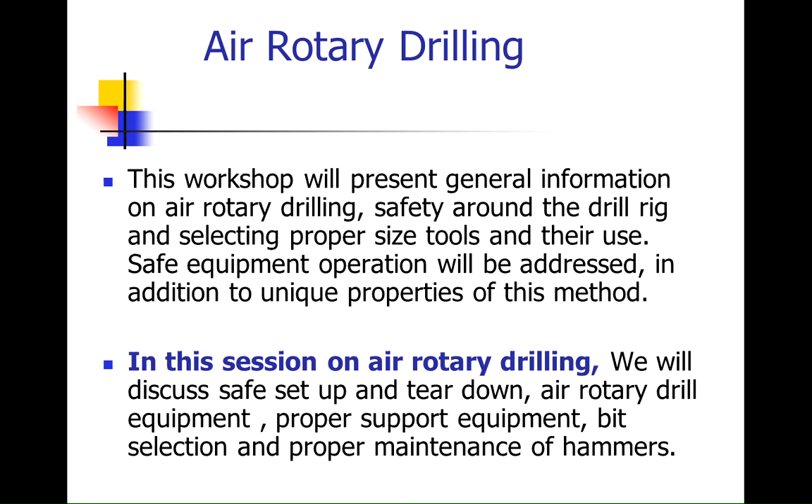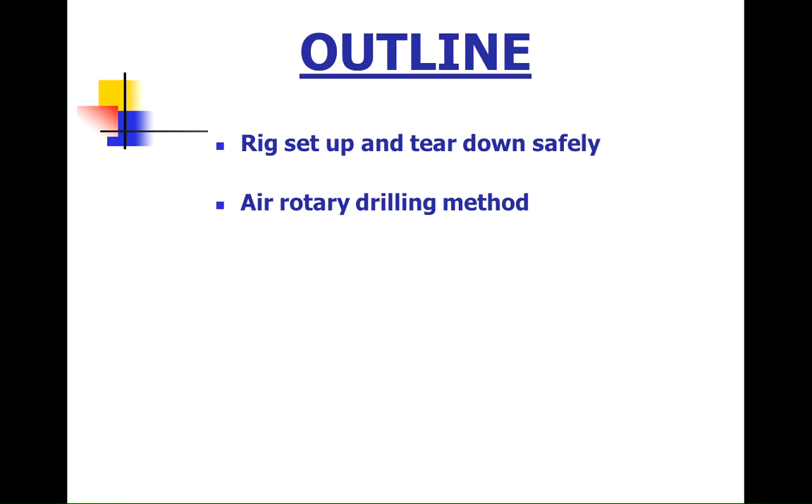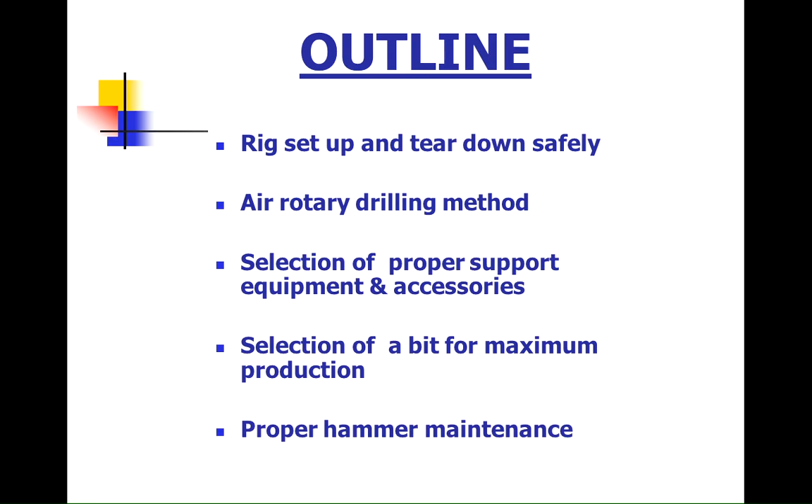So the outline is: rig setup and teardown safely, air rotary drilling methods, selection of proper support equipment and accessories, and selection of bit for maximum production. Proper hammer maintenance is of utmost importance—you take care of it, it'll take care of you.

Rig setup and teardown. I'd like to share with you some safety measures, things to consider at the site location prior to setup. Are you at the right address? This happened last year in Minnesota, and I had another class I was at yesterday with the same incident, where a development with new homes going in set up and drilled the well on the wrong address. So check your address very closely.

Other considerations: always call for utilities locations. Most all states have a one-call system. If they don't, there's a federal number, 811.

They only locate public utilities. Most of our problems are private utilities. And I bet everybody would raise their hand, and I see a lot of heads nodding right here. There are companies that will do these locations, or as we did, we got tired of waiting for everyone.

We bought our own equipment. Yeah, they're a little expensive, like $4,500 apiece, but we got one for the backhoe operation and one for general use. The unique thing is these instruments are probably 10, 12 years old, and occasionally they need some work, but they do serve their purpose because the utility companies locate within 3 feet.

Your obligation is to find it and hand dig it. Yeah, I do that in Minnesota this time of year. But we can locate with these locators right to the nth degree. We can get right down to where you're right on that marking if you use the time and effort to do it, and it saves you in a lot of cases.

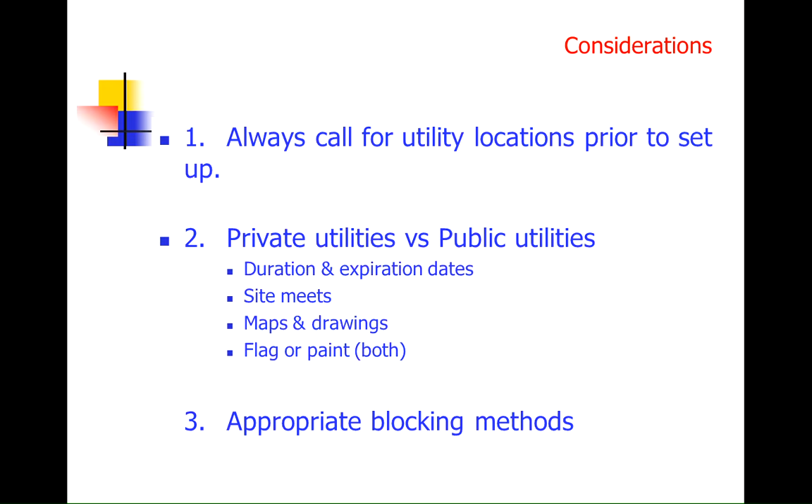Never, I say never, use pallets, cement blocks, or scrap lumber to support this $500,000 to $750,000 rig. You're going to have problems. We did years ago, and it came back to haunt us.

What happened is there was a site that had been developed and sat for many years. We didn't understand there was a high water table in the area, and they put in several feet of fill. We drilled the starter hole, put the casing in, went to push it down and seat it off, and suddenly a massive hole opened up around the left jack. The rig went on over. On that site, they didn't want the drill cuttings all over, so they left the backfill out of the basement. In Minnesota the basements are 8 feet deep, so they wanted all the cuttings to go down into that area. So the rig not only tipped over horizontally, it went another 8 feet further.

There were some costly repairs and downtime on that. We don't need that to happen. So to accommodate that, we came up with these 3-inch thick, 12-inch wide, 12 feet long timbers out of white oak. They support the rig real well. Yes, they're heavy, but we've had several blowouts since then with no tip-overs.

Some of these blowouts have been big enough that it takes 2, 3, 4, even 5 yards of material to move the rig slowly off-site, re-establish that drill site, and move back in. But we haven't had any problems since.

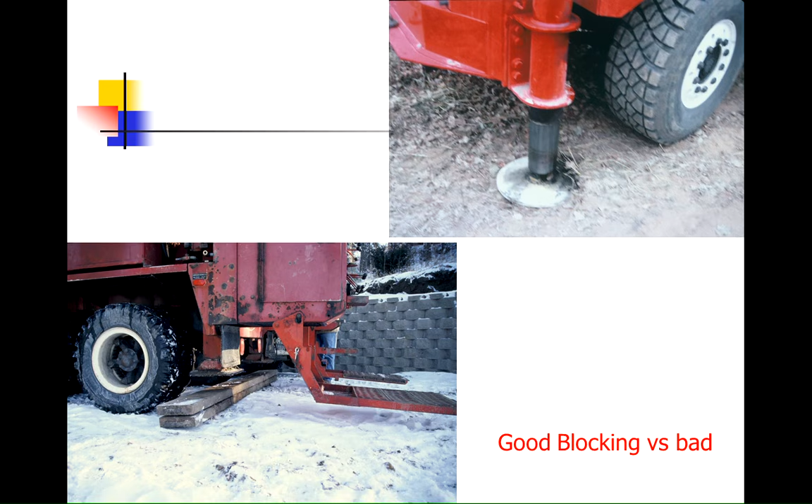Now this driller built a bigger pad for his rig, actually about 30 inches in diameter. It looks like it's big enough, but look here, guys and gals — it slid back a little bit. Oops. There was no blocking underneath the rig except for those pads.

Look very closely — that blew out from here all the way under these stands right to the back tires, and it's about 5 feet deep. That ruined a good day of drilling. It was quite costly to get that rig back up onto its pads and re-establish that hole. So again, there is a reason for proper blocking.

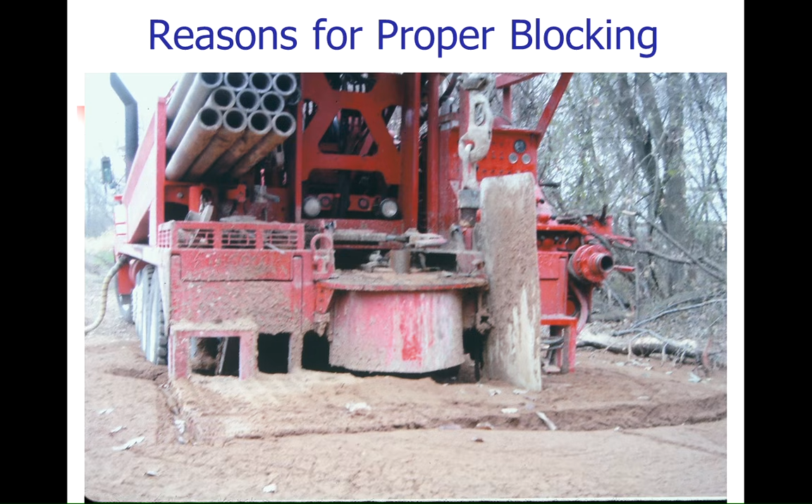Air rotary methods — we want to talk about air rotary drilling.

There are good resources available. First, check with local drillers and the manufacturers and suppliers of different products for rotary drilling you may be doing. The NGWA bookstore is another good reference place. We've got the Missouri Water Well Handbook — I use that all the time — and other handbooks available. Also Groundwater and Wells, 2nd edition; I have the 3rd edition, but I don't have a current slide for it.

These are all great resources for starting to understand the air rotary drilling method. But again, check with your local drillers and see what they're up to with their operations — they've probably experimented considerably and understand this more closely.

You ought to understand, for air rotary, what formations you're going to drill. Are they soft, medium, hard, crevice, cavernous, or all of the above?

Then you have to determine what size hole or holes you'll be drilling, what size drill rod you'll be using for your uphole velocity, and what depth you'll be drilling to.

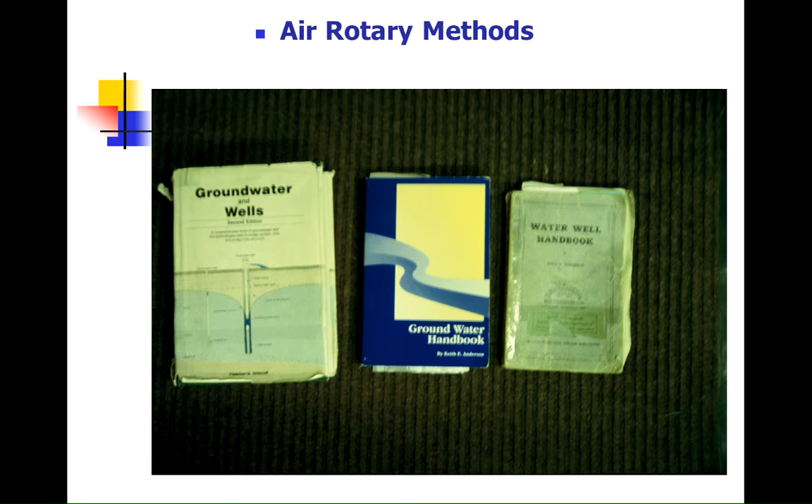Then we have to look at what available CFM (cubic feet per minute) or PSI (pounds per square inch) you have available, or will need, to perform this operation for the best cleaning and penetration. In general, few drillers have too much air.

Air density can vary considerably based on sea level versus 5,000 feet in Denver. That compressor can have as much as a 17% loss at higher elevations. Humidity and temperature also affect this operation — so if you have a hot, humid day, your air compressor isn't going to put out like it should.

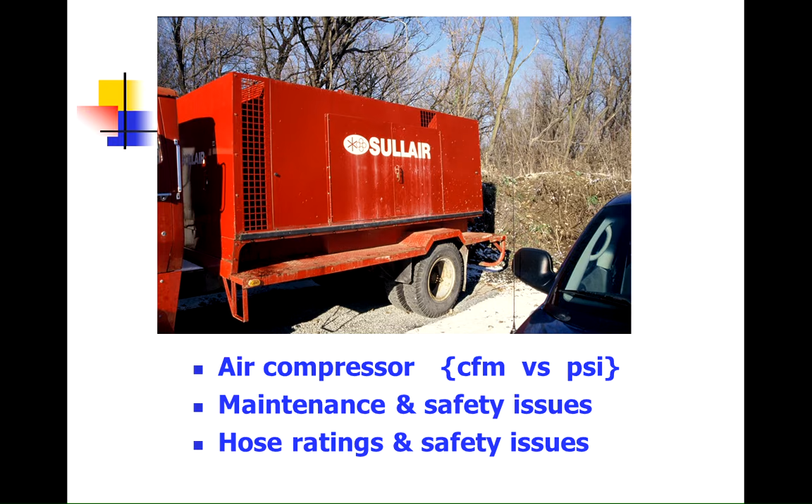We've talked about CFM and pressure, and each hammer has a range. So do you need one compressor? Do you need an auxiliary compressor, or do you need this compressor system that one of our local drillers has? By the way, that was his rig in the previous slide that had the blowout on it. You wonder why? These are 1,200 CFM, 350 PSI compressors that he runs constantly together. I don't know why or how, but I don't ask.

But they can create problems, as we discussed. Our rigs have 850, 350, and that basically fills in the range of what our hammers are required for a specific range of operation. Each hammer has a low and a high point that you can operate in, and you got to pick something in between for optimum operation. So you have to know that.

Anybody have any ideas on some of the safety factors that you would have with high pressure air? Let's cover a few of them.

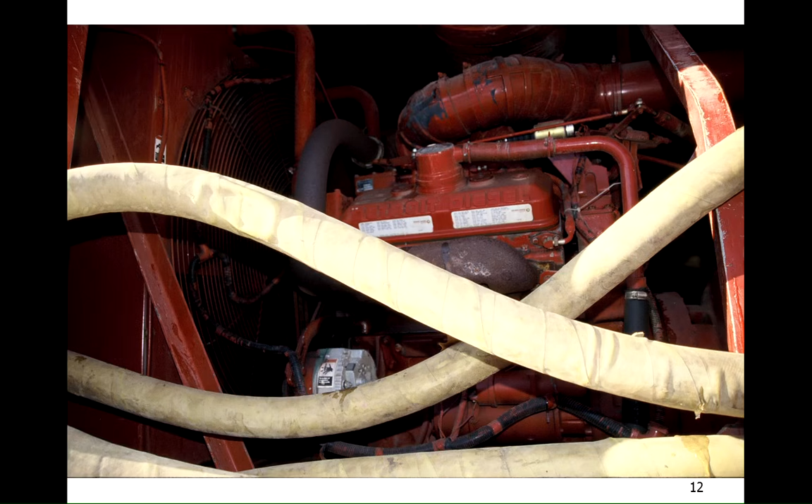Maintenance and safety is of utmost importance. Keep the maintenance up to snuff and safety will come into play. Safety relief valves at the proper setting, not like your mud pump blow-off valves where you're putting those finishing nails in. Keep them at the right setting because you're talking with 350 psi of air pressure, and we'll talk a little more about that.

We talk about blowdown valves. This is a relief valve, so when you're done drilling with a rod, you take and open up this blowdown valve, and you can relieve the pressure, most of the pressure on the drill stem prior to adding another rod.

This picture here shows a hose with some bulges in the casing. I think you can see them from the back, but this happened quite quickly. It was an older hose, but it was a hot summer day, and all of a sudden it started showing bulges in it. That's ply separation. That means you're going to have problems with a blowout sooner or later, or that thing blowing apart, and certainly don't need that. So understand the hose ratings to come into play with the safety when you're purchasing new hoses. You put in a fudge factor in there for temperature and pressure.

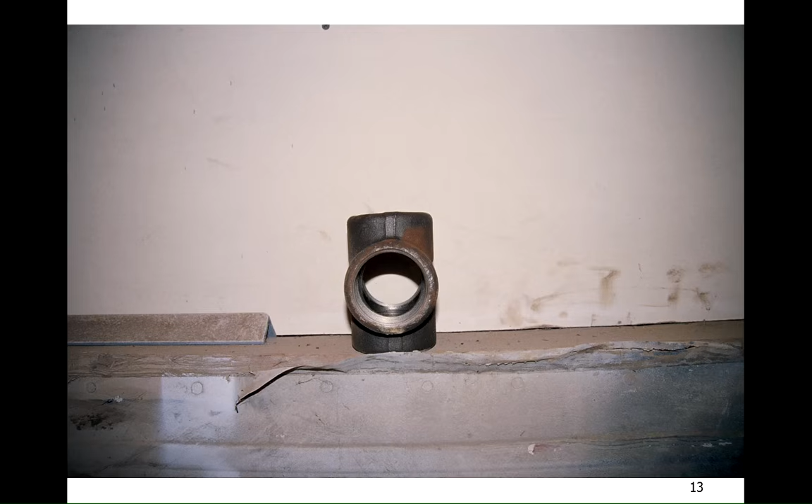Select the proper fittings. You're talking with 350 psi of air pressure. You don't want to be using a standard fitting on that. So if you do any replacement plumbing or additional plumbing to that rig, make sure you have the proper rated fittings.

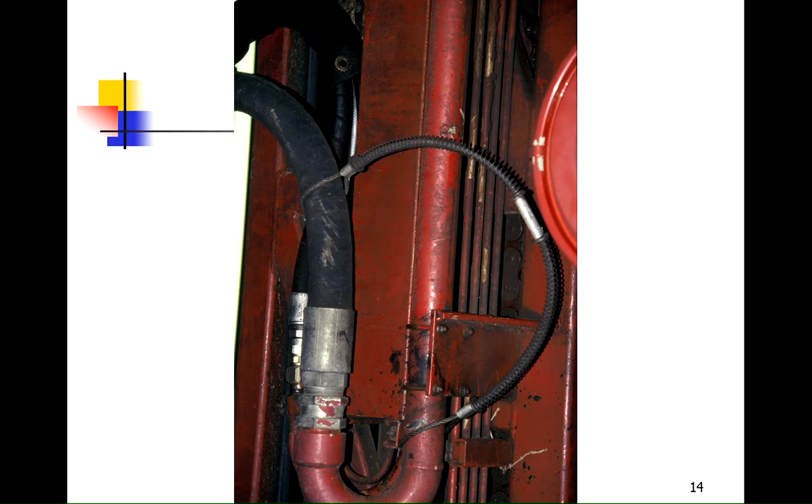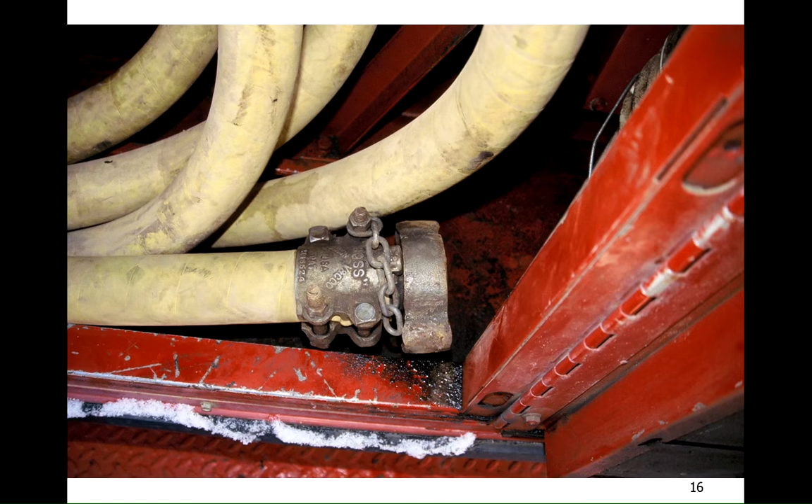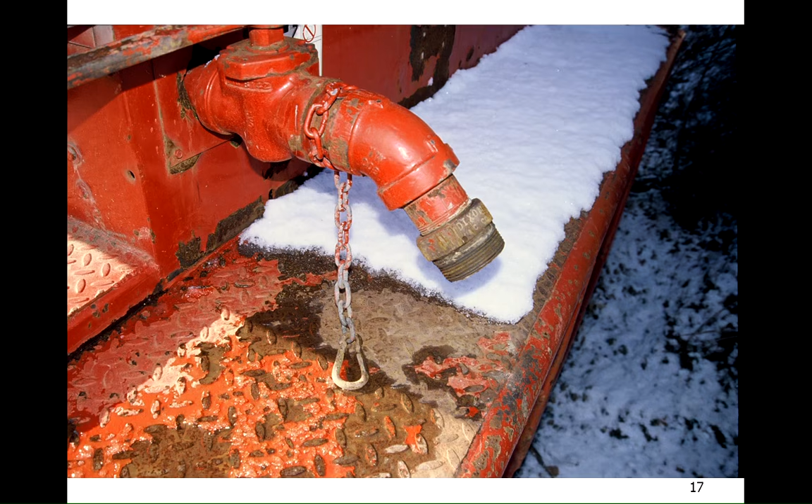Hose securement is of utmost importance, and most of the manufacturers of the equipment nowadays are putting lanyards on there so that they're secured, and that way if they unscrew or they blow off, generally it happens at the joint, they'll be secured. Now if you can't do that, here's that old hose that has a compression fitting on there. You put a longer bolt in there, a short piece of chain secured down with a lock washer and a self-locking nut on that, and then on the back of your compressor you can put a short lanyard chain on it to hold it on, so if it unscrews or blows off, it's not going to hurt someone.

This happened on one of the drillers up in Hastings, Minnesota, a big dude, and that hose came off up above, came down and hit him, and it took him to his knees. He's here to talk about it, but that could have been really a dangerous situation there, having a hose blow off at 300 psi.

Importance of proper bit selection. Look at the formations on that rock formation in Hudson, Wisconsin. You've got every variety of garbage there that you could ever dream of with all these varied conditions. So when you make a bit selection, you're going to have to determine what possible formations you may be drilling in and make that choice. If you're going to use a mill-tooth bit, generally, if you're getting into a cobbled mess like this, I recommend a short tooth, which is a hard pattern bit, so you can accommodate all the different drilling techniques. And again, if you're getting into a softer formation, you can get the longer tooth for better penetration.

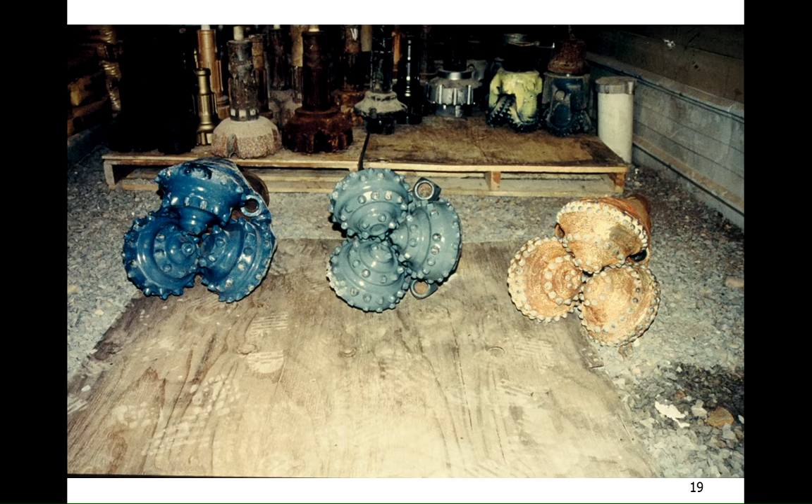If you're going to use carbide button bits like the blue one up on top, then you can select those for the formation you're going to drill in. The one on the right is a short pattern for hard formations. This is a medium pattern with medium buttons, and this is a big button pattern here for the softer formations. So check around, figure out what you're going to need, and go forward with that.

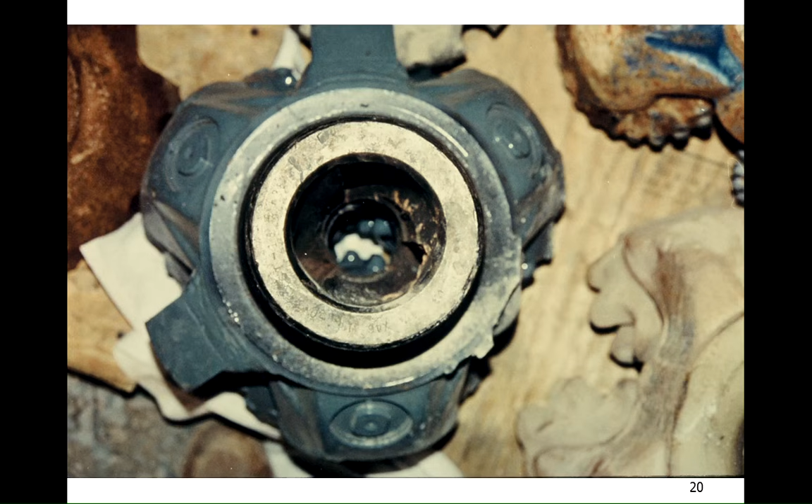The other thing that we use and comes in quite handy is on the mud rotary, they blow out the retipped or used bits in the center for better fluid. This holds true with the air compressor air rotary method. It allows more air, volume, and pressure to go through there for a cleaner surface on the drilling bit. Therefore, the penetration and production are a lot faster.

Anybody using the PDC bits? Okay, they work pretty good? Like anything else, some formations they work good, others they don't.

Downhole air hammers. When considering the method of drilling, several questions need to be considered, as we just covered: the formations, the drill rod size, the hammer selection, and things of that nature. Bit selection is very important as well. Again, we talked about the different sizes, and then experiment. Talk with your local reps as to what other drillers are using in the area, understand the formations you're going to drill in, and then experiment.

Some hammer and bit manufacturers come to us drillers occasionally with a bit or a hammer that they want to experiment with. Let them do that. It might take a little downtime, but it gives you a free hammer and a free bit for a while.

They don't always work. We had a bit supplied to us and a new style hammer, and our formations, as you saw earlier, are a hodgepodge of everything. That bit shanked on us. They brought us another bit, it shanked. They knew our history of not having shanked many bits over the years, so they went back and checked it out, and it was designed for a softer, consistent formation, not ones with soft and hard formations and crevices in it. So they removed that hammer and bit combination from our region, and they use it elsewhere very, very well.

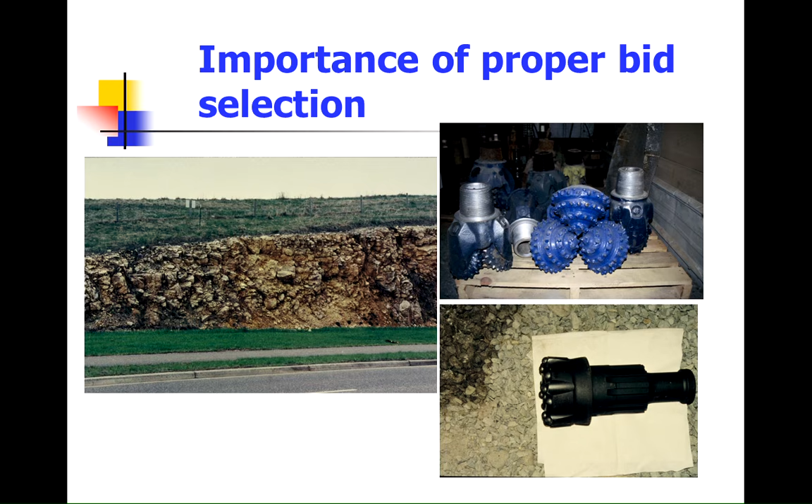Bit size and hardness is very important in bit selection, as we talked about. We generally use a flat bit, like that black one down in the corner, for small diameter holes. It's flat and it penetrates quite well. Another reason we'd use that is in an area where we didn't want to use a stabilizer - we can run that flat bit and run a pilot hole down, whether checking for nitrates, VOCs, or whatever. We can get the water sample or determine where that aquifer is and if the formation is stable enough to put the casing in and complete the well. Run that down 200, 300, 400 feet, whatever, and then you're ready to open the hole.

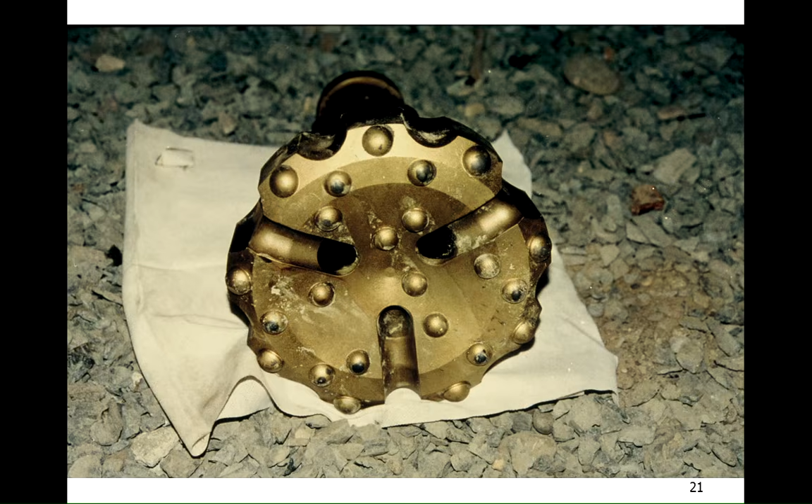There's a concave bit there that we use in larger diameter formations. The concave runs it straighter in the varied formations. But then we open it up with what we call a hole opener. Have you guys used hole openers in the past? It has a shank right here - there's a guide shank that goes in that 6-inch hole, and this is designed for 6 by 8, 6 by 10, 6 by 12, whatever you desire to open that hole up to. They work quite well and speed up the operation in developing a hole of that size.

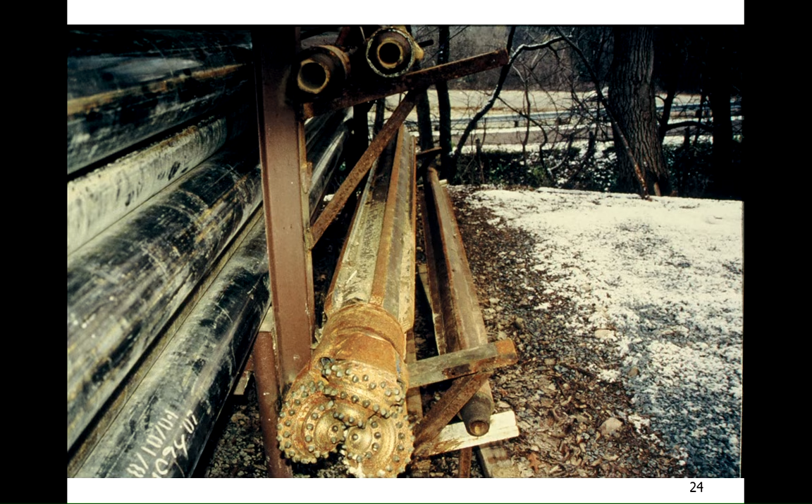Stabilizers. This is one we would not want to use in air rotary drilling in bedrock - this fluted style here would knock a lot of chunks loose. You would either use a barrel tube type or a spiral type stabilizer, and I'll show you another alternative later. Stabilizers are used quite often in bedrock to keep the hole straight, because there can be crevices at different angles that cause the hole to wander. Again, you'll have to experiment with it and see what works best.

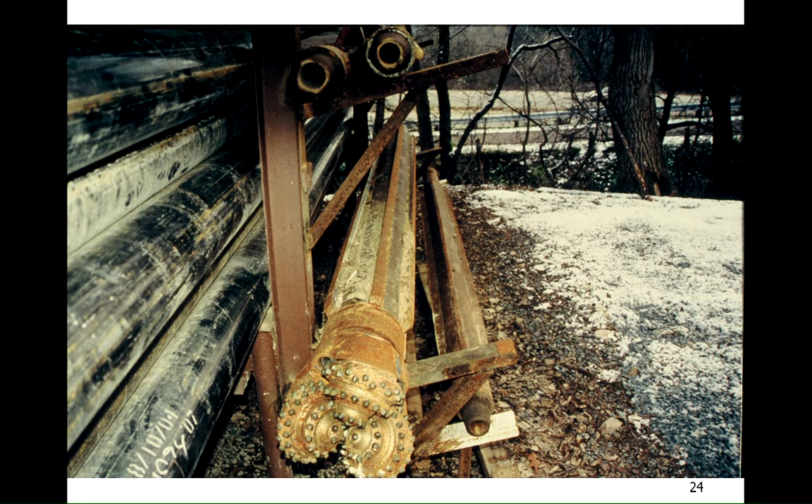If you do use these different stabilizers, you may want to consider putting some drill out lugs on top. The reason is that in the drilling operation, you may knock material loose that falls down on the stabilizer and tool stem as you're trying to get it out. With those little lugs on there, you can back drill your way out and regrind it backwards. We've used that on several occasions over the years, and it saved us on recovering those tools and maintaining that hole.

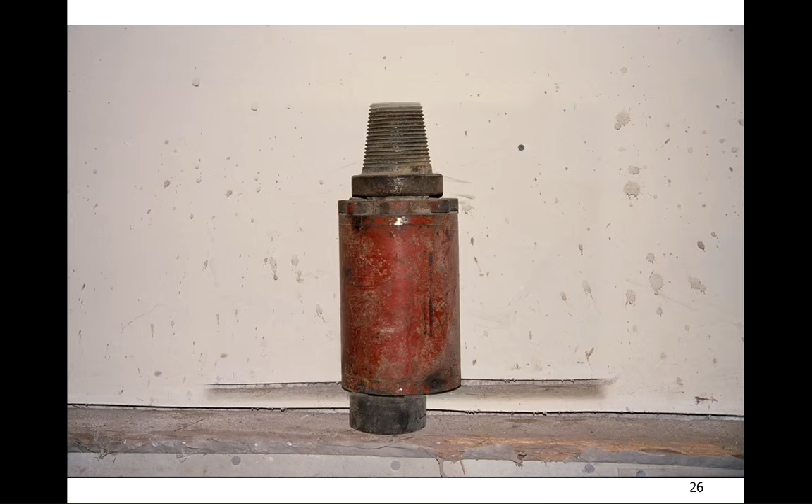Let's talk about rotation speed - I skipped over that for a reason. Rotation speed is extremely important. Of course, with tricone you want to run faster for better penetration, and the rotation speed is controlled by the rig you have. If you have a table drive, as Roger was talking about in the other class, that gives more options for speed selections for tricone operation. But when you come to hammer operation, you want to slow that down.

Okay, let's go over to the top head spindle drives. You're pretty much controlled by the speed of the orbital motors on the top head drive, and generally when you buy the rig, you make a selection of orbital speed drive motor speeds.

That was really unique. You design the top head for the orbital speed that you want, the spindle speed. So if you're going to do a lot of rock drilling, you try to decide what speed you want based on your hammer rep's specifications or suggestions. But again, it makes a difference whether it's a table drive or top head drive.

Saver sub, I'm looking at one right now. How many use saver subs? Good. That saver sub is just a short sub with a female-male piece on it to go on the end of the spindle of your top head drive, or on the end of the Kelly, to protect the threads. Sometimes you drop it down a little bit, or you go to make it up and you hear the squealing, and it wears and tears. And why tear up a spindle, which is quite expensive, or tear up a Kelly that's equally as expensive, when you can, for a couple hundred dollars, buy one of these saver subs and screw that on and let the wear and tear happen on that unit.

Pull down and hold back pressure. Pull down is usually used at the start of the hole because you don't have enough weight on the drill stem to get the proper weight on the hammer or the bit for best penetration rate. So you would use pull down, pulling hydraulic pressure down on it, or on the Kelly drive, your feed, to keep a modest pressure on there for best penetration. Hold back pressure is used as you start getting down several hundred feet and you keep adding each one of those 400-pound rods. Now you get too much pressure on there, and it's going to cause excessive wear and possible breakage on your drill stem and your tools. So you use the hold back pressure to hold that to the maximum weight that would give best penetration for you.

We had a gentleman that borrowed our hammer for a table drive rig. I tried to explain to him the importance of slower speeds and lesser pull downs, and to listen to the hammer making a good rat-a-tat. And he, probably like me, hard of hearing, went out there and put that thing in high gear and put all the pull down he could on that thing, and there was a muffled sound on the hammer, which became a squeal not too much later. He ruined a good bit, but he learned that there's importance to slowing the speed down and taking all that pressure off. They paid for the bit, and it was a good lesson learned by all. I still rent my hammer out to them once in a while.

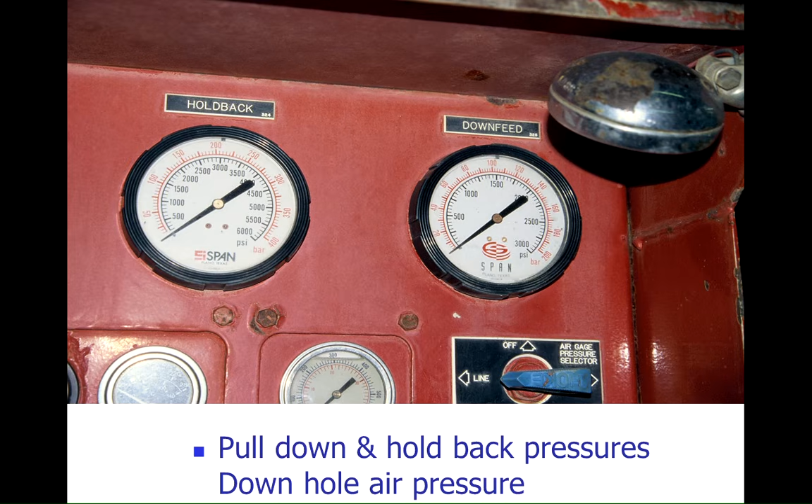So when we get done with the drilling, we give it a little more time with the foam to clean the bottom of the hole, and then we would shut the air down, pull the discharge valve, the blowdown valve as we call it here, relieving that pressure, but be aware that there still can be some back pressures there.

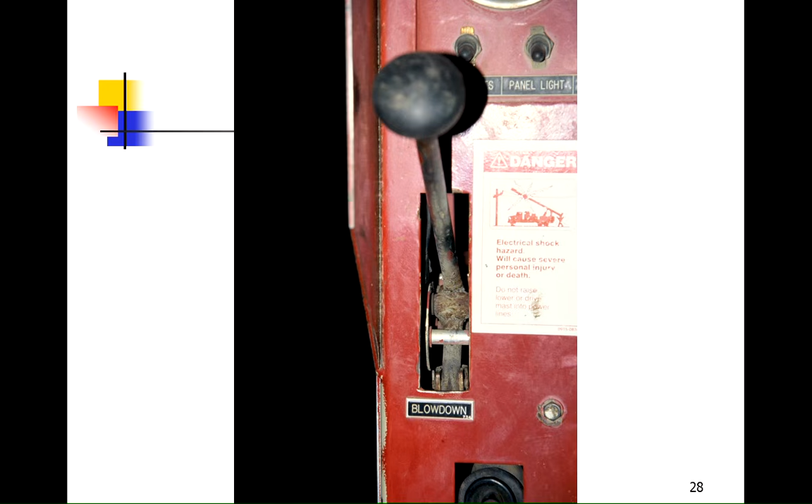Let's get into some PPE.

Of course, we were just talking about taking those rods apart and the potential for debris falling out or blowing out of those rods. You want to use good hearing or good eye protection, and make sure it's ANSI approved so that you don't have any shattering of cheap lenses that could cause eye damage.

A lot of times our guys will wear sunglasses designed for being out in the bright sun and what have you. They're real cheap to buy, so keep some extra ones in the truck so nobody gets hurt. Safety glasses can be bought and worn by those that wear glasses.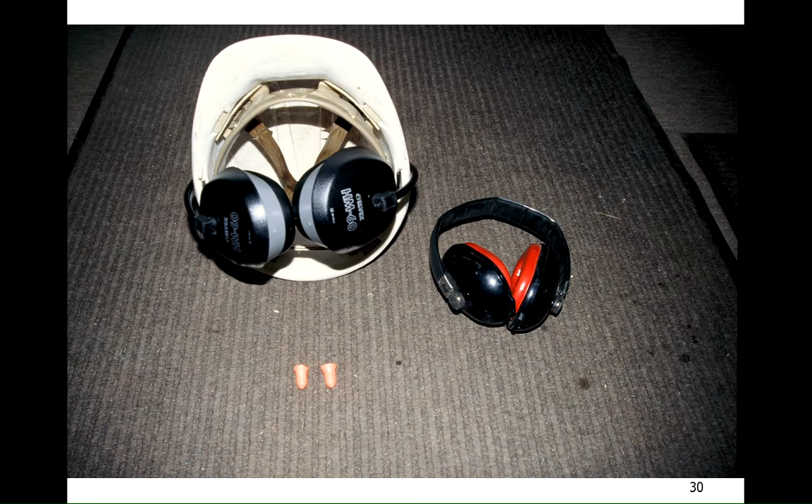Gloves are of utmost importance. When you're drilling in the summer, those drill rods can get extremely hot with the temperatures coming through from the compressor. And of course in the winter it's going to be cold, so you want hand protection there.

You got to be careful with the drill rods. They can get little scuffs on them from the breakouts, and that can cause some cuts on your hand too. So why not wear gloves and protect yourself the best way you can?

Hearing protection, there's several ways of doing that. It can be as simple as the inner plugs right here, or the helmet mounted ones. I've got one of my guys who doesn't like the weight of the helmet, so he puts this on behind his head with a strap back there, which would drive me crazy. And I had an employee years ago that had, like hearing aids, molded to match his ears. He said he really liked those - more comfortable than the styrofoam ones in his ear.

So there's a lot of varieties there, and even a couple of our people have put the inner ones on as well as the outer ones because of the long-term exposure to the noise of the air compressors and the operation of the drill rig.

Who has more exposure to the noise levels on your rig, the operator or the helper? The helper, correct. We were involved in a NIOSH study years ago, and they put a perimeter all around the rig, and it was the helper because he's walking around the rig to all the different exposures - the hydraulic pump noises, the air compressor noises, and the repercussions off the house on that specific job site, the noise of the air compressor going up and hitting the wall of the home and coming back.

But as you get into soft zones with too much air, you may be bellying out or causing blowouts in the drill hole, which requires more uphole velocity, more air, and can create caving situations that come back to haunt you. It's more costly to run that air compressor wide open to keep that hole until you get the casing in it, and it also slows down the production rate.

As a rule of thumb, with just straight air drilling, based on your hole diameter and drill rod, you'll need 3,000 to 5,000 feet of uphole velocity to maintain proper cleaning of the hole. That would be about 6 to 7 seconds per 100 feet of depth on that hole. This can vary by the size of the cuttings - dust, of course, raises much faster, but if you get something the size of quarters, it's going to take a lot of air and a little more time for that to come up.

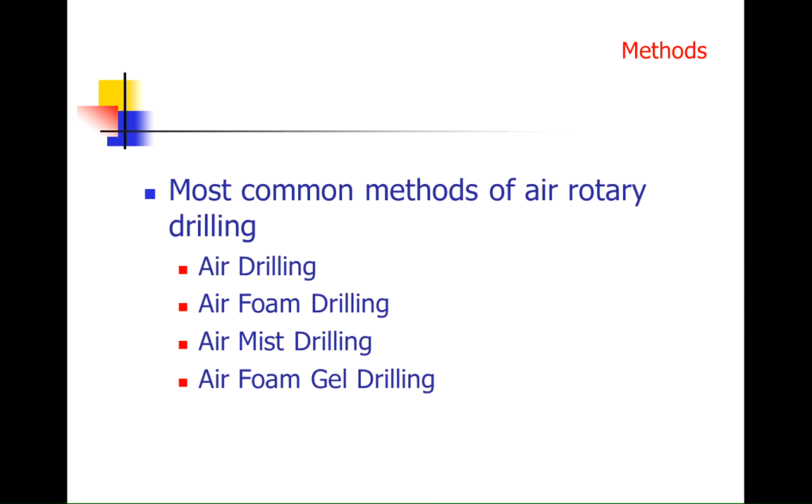You can try that method, but again, it's going to take experimentation. I just talked about pouring some oil in there. Rock drill oil is a specific oil that's environmentally safe, and it lubricates the hammer during operation. But when I first got into this, I said, oh, rock drill oil, I heard about that. So where am I going to get this stuff?

So I talked to my local supplier, and he said, oh yeah, Texaco Aries ISO 100 rock drill oil. He knew really what I was talking about. So you get a 55-gallon drum, and when this gets low, I just order another one. This helps lubricate the hammer to prevent rusting and better operation. When we run the heavier foam, we don't run the oil injection. When you're running foam like shaving cream, that gives plenty of cooling and lubricating properties to keep it going.

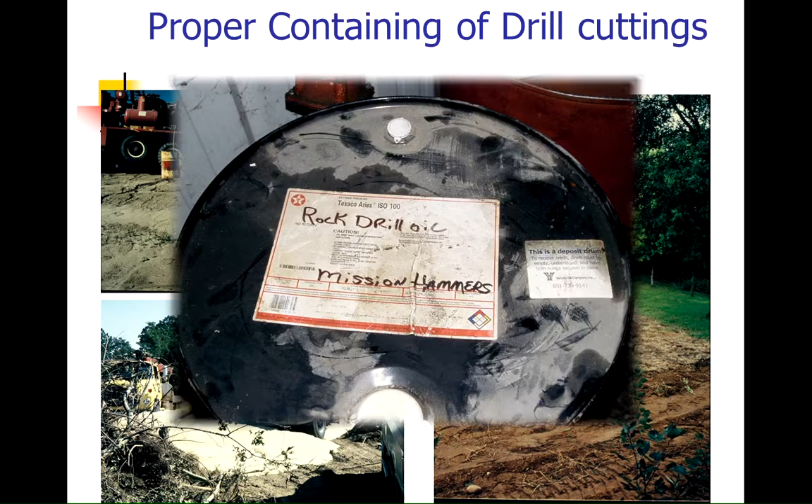Proper containment of drill cuttings - it's an issue for everyone. The first two slides on the left, of course, are very obvious. There's room for that stuff to run. Everybody's getting more concerned about this stuff, and you better have your MSDS sheets on board so when someone comes up and says, what are you drilling or what do you got, you can show them what they are.

The slide on the right, you see that little spot there that kind of goes down the yard and over there? We're on the top of a hill. Folks, there was no place for anything to go. It went downhill. When we got done drilling, we went down and we shoveled all that foam off the top of the snow. And of course, you know what happens when you tromp the grass down or you remove the snow, it froze the ground.

But in the spring, the homeowner came to us and said, okay, you got to fix my yard. Okay, fine. Well, we went out there and I took this picture. Doesn't that look awful fresh, guys? He had new utilities put in because the gophers got down and ate the gas line off and they put a new one in. He wanted me to pay for the whole yard. I said, whoa, time out. I'll help you, but I'm not going to pay for the whole thing.

Documentation. These doggone things, I hate them, but I tell you what, take all the pictures you can. This will save your little tush every time. And we take pictures on almost every job, and we're putting them in the customer files to protect you.

Containment bags are becoming real popular in certain areas, and I know Roger Renner's had to use them. For air rotary and mud rotary, you're to use containment bags. We're kind of skirting the issue a little bit in some areas. Other areas you can't get away from it. I've used vac trucks to vacuum up our materials, and we use silt fences all the time to try to prevent stuff like this. But again, in some cases you can't get away from it.

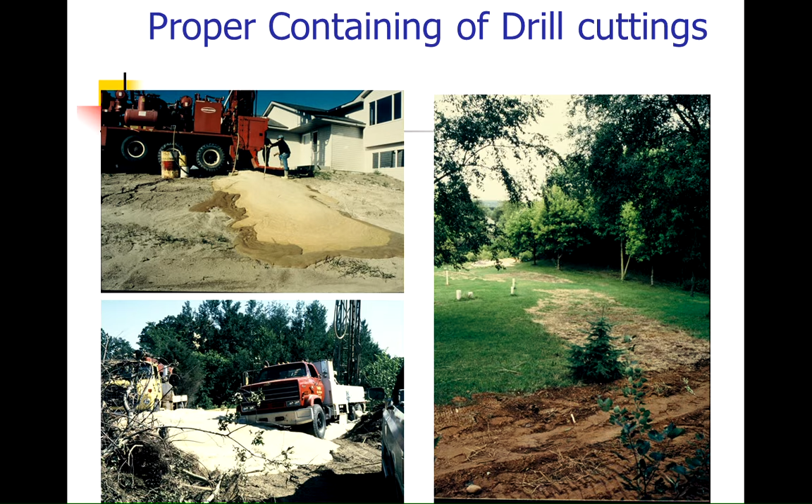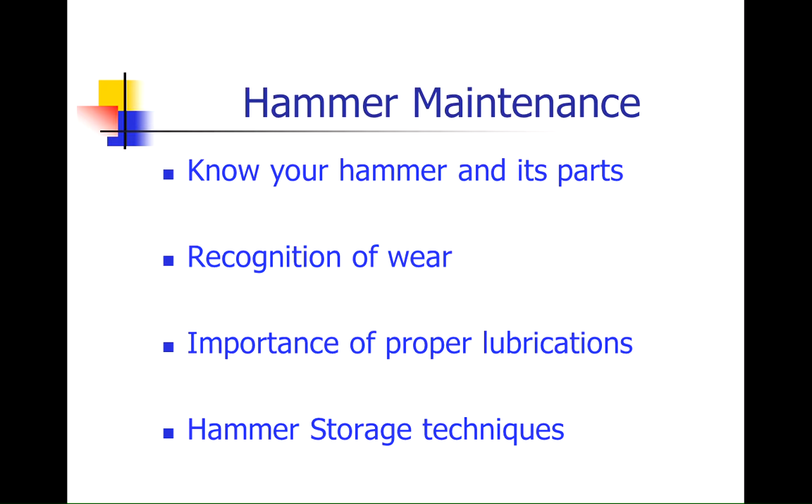Let's talk about hammer maintenance. Know your hammer and its parts. Know how to recognize the wear. And I talked about the 190 psi on our hammers, and we understand how much foam we're putting down there or how much air we're putting down there to recognize the wear on that hammer. And the importance of proper lubrication, whether it's the foam and the drill oil or one or the other. And hammer storage techniques are extremely important.

Hammer care, understand the consumables, and carry some of them with you. You've got the dart valve, the O-ring, the blow tubes that may be on some of the hammers, and of course there's a piston right there. And we carry a lot of that stuff on our drill rig, so if we see a problem, we tear it down and fix it right away.

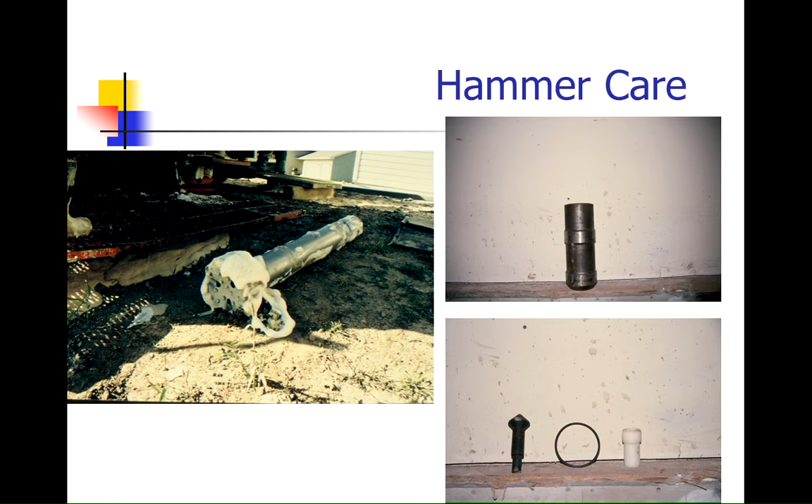And then of course here's the hammer care. We blew this hole into this formation, got it out of the hole, and put the casing in as quick as possible. Then we turned around and cleaned the hammer up for proper storage.

Always store the hammer standing up. Clean the hammer out, pour a little drill oil in it, and stand it up. On our drill rig, the hammer is stored in a 12-inch piece of pipe, so that 6, 8, 10, and 12-inch bits can fit right in there.

We've got a containment chain on it, and of course it's capped on top. Then the little hammer in the shop is stored up against the wall, chained down next to the big hammer. That guy is about 6'3", so you can understand how long that is.

Remember we talked about stabilizers, and I told you we were going to show you something we did in place of a stabilizer. This is an 8-inch hammer, 8, 10, and 12-inch hammer, with a 4.5-inch box on it. Our hammer rods are 3.5-inch. To put a short sub in there would put a lot of strain in that part of the system. So to reduce that, I went to a machine shop, and he made me this 5-foot-long solid steel rod with a 2-inch hole bored through it, with a 4.5-inch pin and a 3.5-inch box.

It's amazing how rigid that is and how that keeps that hole straight. In a lot of cases, based on the size of the hole and the formations we're going to drill through, we don't put a stabilizer on. So it saves us carrying extra weight out to the job site. It's things like that you can turn around and develop on your own. We also put some slots on it so the fork would fit in for tear down and makeup.

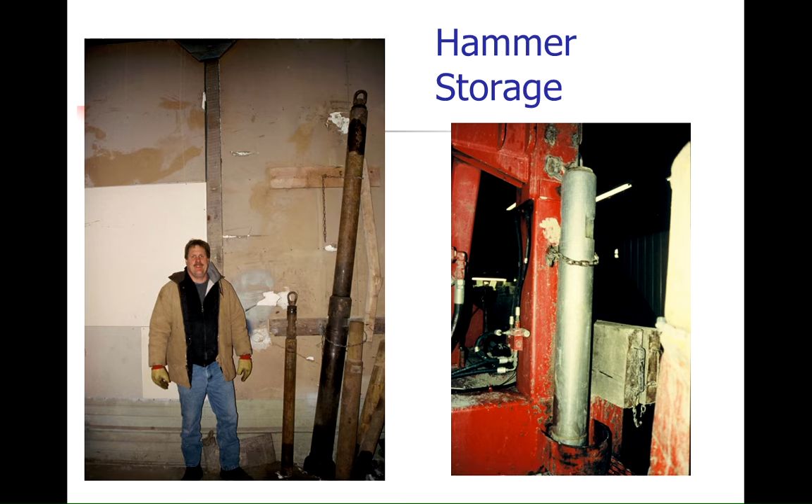But again, store the hammers in an upright position. Make sure they're clean. Same way with the hammer transport - we've got these hammers in the back of the tanker there, and we've got the plugs in them.

And we got called in on the scale for not having it secured. That's nothing more than a dog chain. Last 5 years they haven't argued with us - it's something that secures it. They told me I had to have that securement chain on there.

He's a rookie, and his boss laughed at him. But he says, you know, in case you hit a bump, that could bounce out of there. And I said, sir, with a tri-axle truck at 50-some thousand pounds, if I hit a bump hard enough to pop those hammers out of there, I don't want to be in that truck. His boss laughed at him, but he says it needs to be secured. I said, fine, no problem.

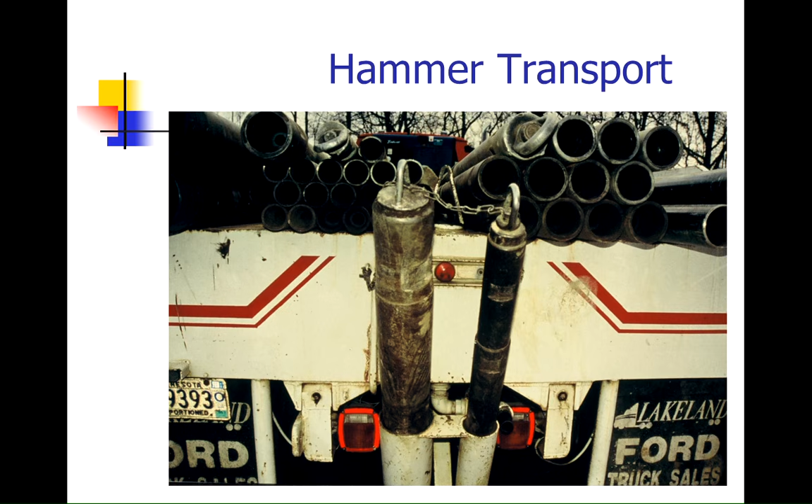And on load securement, we'll talk about that in a minute. But if you take care of these hammers, they'll take care of you. It doesn't take a lot to blow them clean, flush them out, put a little oil in them, put a cap on them, and secure them properly.

I don't know any man around here that can handle a piece of 4-inch, 6-inch pipe on top of their helmet, and if one of you say you can do it, I'm out of here. Hold on, back up - I want to show you one other thing. In that corner down here, it's hard to see. I'll tell you what, I've got another picture.

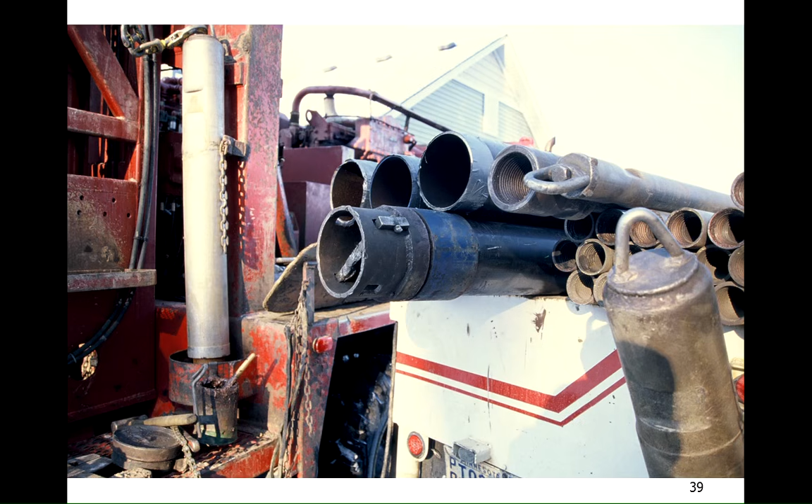There, up there, right here is a basic screw-in plug with a swivel on it, and we put some 7/16 rod on there so you can turn it better with wet hands. But that can get worn, bent, or cracked. Inspect all this stuff all the time to make sure you're not going to have a problem with it.

There's another item right here. This is what we use on 6-inch plain end that we developed to elevate the casing and use the hammer to screw it together and drive the casing. How that works - it's a little hard to see - but there's a limiter ring right there that limits the amount of threads that can be threaded into that coupling so you can unscrew it.

Another look at it - here's the 3/4 inch wide plate, about 2 to 2.5 inches thick, that the hammer sets in on. A 6-inch hammer with a cross pattern sits right in there, and you can screw it together. It's an old dummy bit anyway with no buttons on it, and you can drive that casing on down to seat it off.

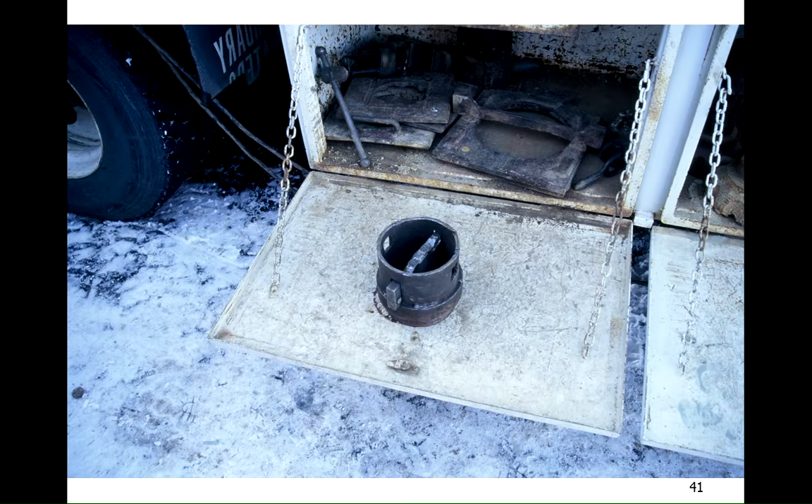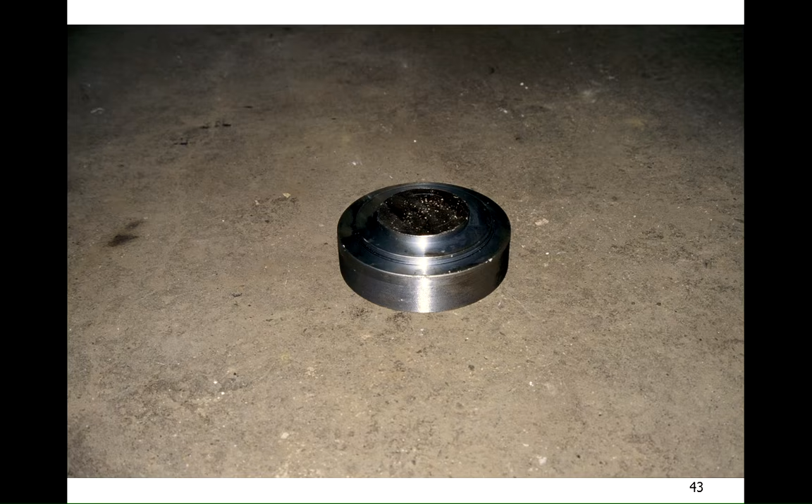We make driver plates to go in the 4-inch and 6-inch casing. We buy stock at a local supply house, put it in the lathe, and turn it down so there's an adapter that goes in 4-inch plain end and threaded, and 6-inch plain end and threaded, all in one unit. It has an indent on top where the hammer sets in so it doesn't scuff off or kick out. It really helps us in seating off the casings.

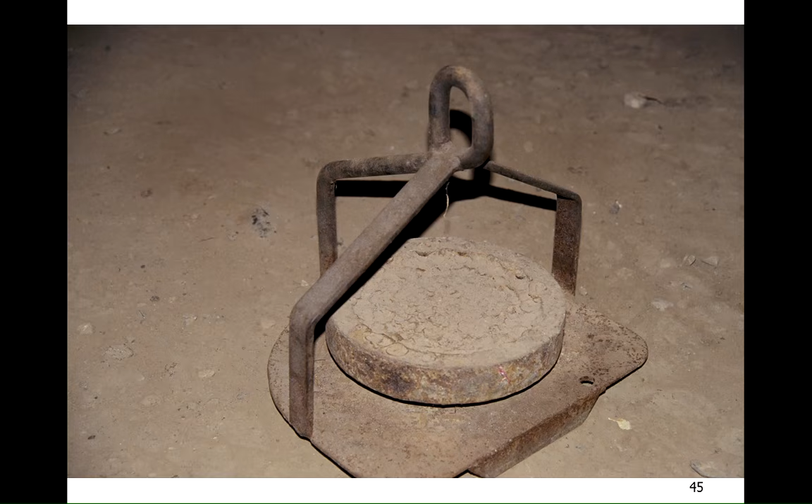To get that driver plate in place, sometimes it's up 3.5 feet or so, off the table. You know what the regulations are, guys. We've built this basket here, and you can see this little plate. It kind of cocks it backwards, and these are more towards the front, so it's a cocked situation.

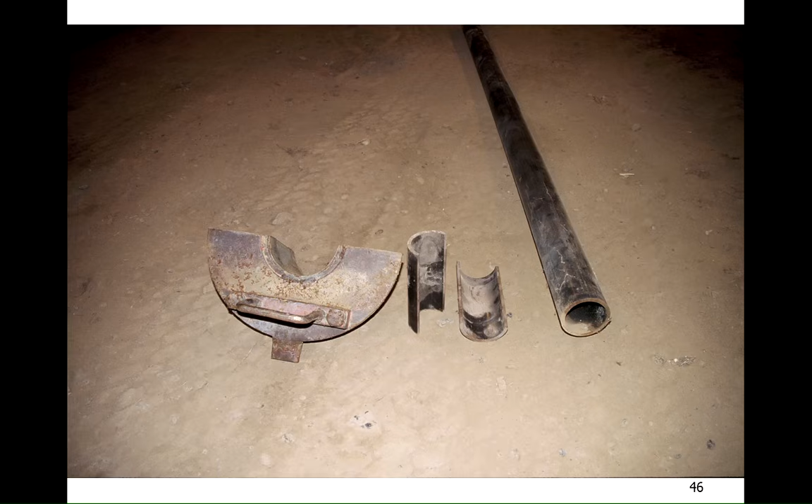So you take that up to the point, push that driver plate onto the casing, and you can drive the casing. It's up to you to decide how and what you want to do with it, but these are just some suggestions.

The other thing is guide slips on the table on the drill rigs become worn over time. The drill rods get worn, and you get that blow-by, and it's a pain. What we found is once they wore to a point after the rig was a few years old, we took them to the machine shop. We found this nominal pipe available at a supply house, and we had them machine it out to accept the outside diameter, cut the length we want, then cut it and split it in half. Install those in there, weld them in with stainless steel rod, and use them until they wear out.

Then you just grind the weld off, take another one, cut another piece, split it, put it on there, and weld it on. It gives a very tight fit on those drill rods, because if your drill rods are wobbling on top, what's it doing on the bottom, and what's your hole going to be like? The straighter you keep the hole, the more production you can make. This is just an idea that we use, and it works quite successfully for us.

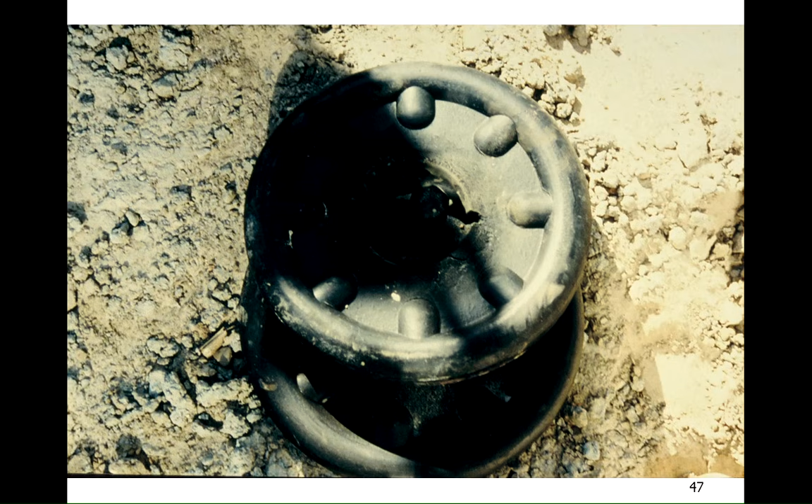Your donuts, as they're called, sit underneath the table to prevent debris from blowing up. We found a little trick: using the small diameter 2 7/8 rod size donuts until they start blowing by. We've got a belt cutter, and what we do then is cut it to the 4.5-inch rod size. You get double wear out of it. Nah, that's not good enough—let's go for triple wear.

What you can do is on our 8x4 wells, take that donut that's starting to leak on the rig and put it on top of the 4-inch casing over the 8-inch casing, and that prevents the debris from going down on your final drill out.

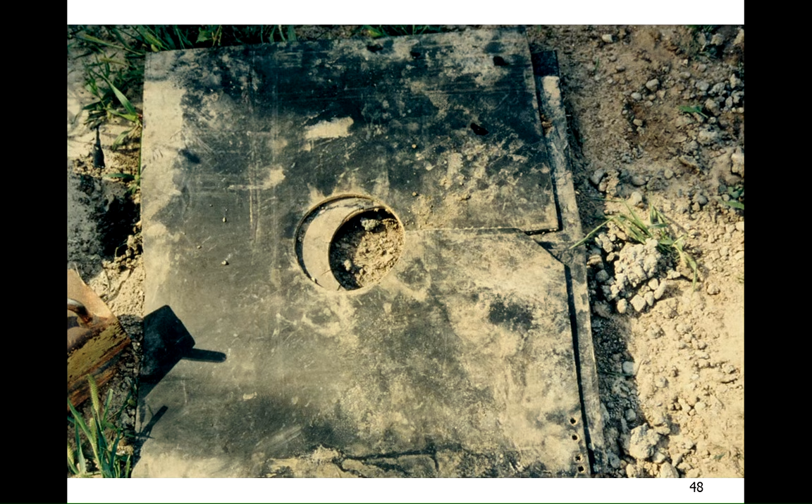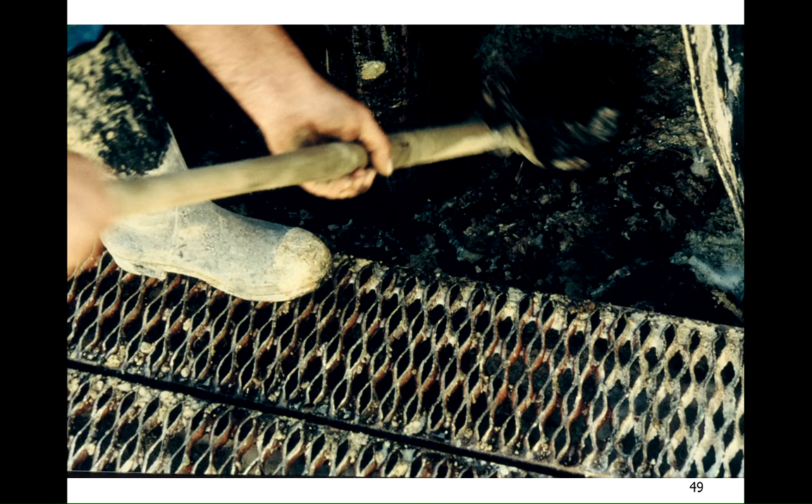And if you don't have that on your rig, you can take some regular conveyor belting from the local gravel pit, cut a hole in it for the size diameter of casing you'll be using, with a little split, and put that over the two casings. Then you shovel a little material on it so the cuttings will wash away and not go down the borehole, which prevents you from getting a good grout job.

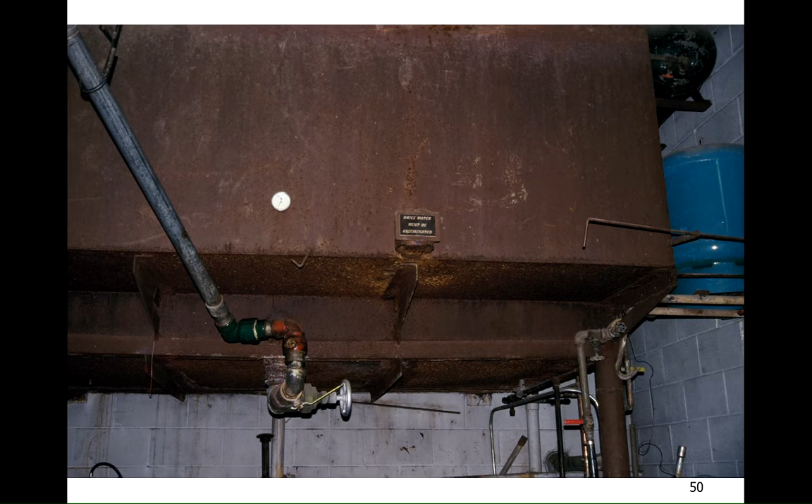Minnesota gets a little cool up there occasionally. It's a mindset, folks. So this is my old tank—I've got to get some pictures of the new one.

This is a 2,500-gallon tank in our shop that's about 7 feet off the ground. They back the tankers in and use this pipe right here, and it goes down in, and they download. What's unique about it is I've got a 60,000 BTU gas furnace hooked up to a 100-foot roll of 1-inch K copper, closed-loop, spiraled through that tank back into the furnace. I have a Roberts-Hamilton ball valve for filling that tank automatically, like a toilet.

Then this furnace kicks in, and in the beginning of the season we set it at about 90 degrees. As it gets colder into the winter, we go up to about 140 degrees. You don't want to go any hotter than that, because it gets so much steam you can't see anything.

And oh my God, does that make beautiful bentonite. Carl Mason was up in our area helping us out with some stuff, and we mixed up that bentonite, and he says, I have never seen bentonite so creamy in all my life. It mixed real well. The guys are standing there on the side of the truck, and customers are looking at those guys with their bare hands thinking, wow, those guys are tough. The water's 140 degrees, they're warming their hands. But it's a real simple operation. If you're in a cold area, it doesn't take a lot to build it. Build the tank, a little 60,000 BTU, and it works great, guys. It really works great.

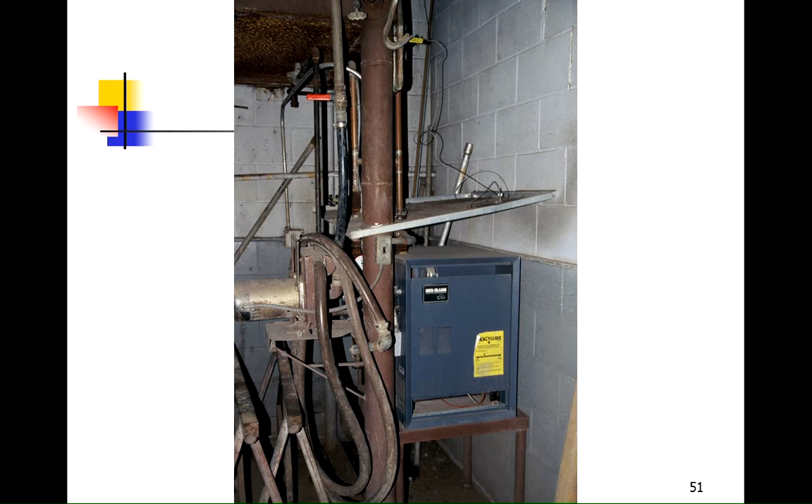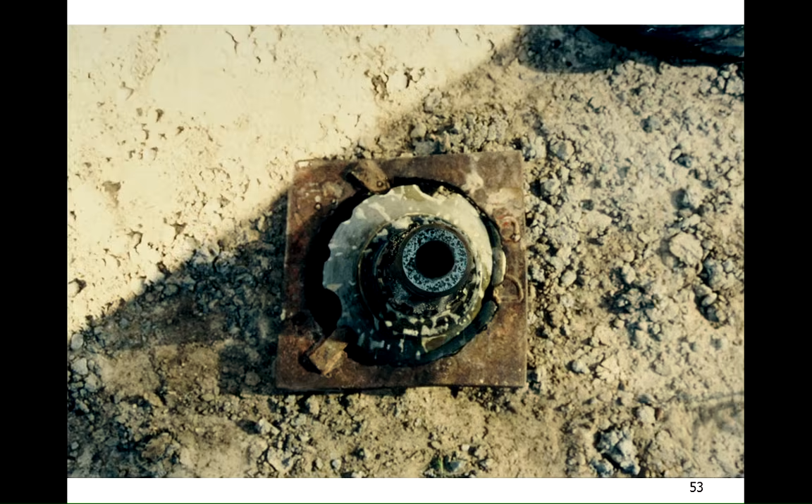Containment. You've got to be able to secure things properly. I have DOT doing the training of their rookies in front of my shop. I have Minnesota scale half a mile up the hill, and Wisconsin scale two miles down the road. I do my exercises every morning, people. And I've been to court four times and I beat them because I know the rules and regulations. So you need to know that for your DOT operation. Keep everything in order and know your regulations.

Completion of the well. Be sure and properly seat that casing for the best well you can. It needs to be properly grouted to protect it from contamination. Proper development makes it the best well ever. I was just on a well recently, and it just wasn't doing anything. We went in and redeveloped it with our air compressor, and I made it three times the well it was. It was down about 3 gallons a minute, and we got it up to about 25 gallons a minute, just by going into the air compressor, redeveloping and blowing the cuttings out of there. The technique of that driller was he'd come in and drill the well using water, pumping it down the well, but he wouldn't blow the debris out, so he was actually plugging the aquifer. We went in and blew it out with the air compressor and scrubbed it and made a heck of a well out of it.

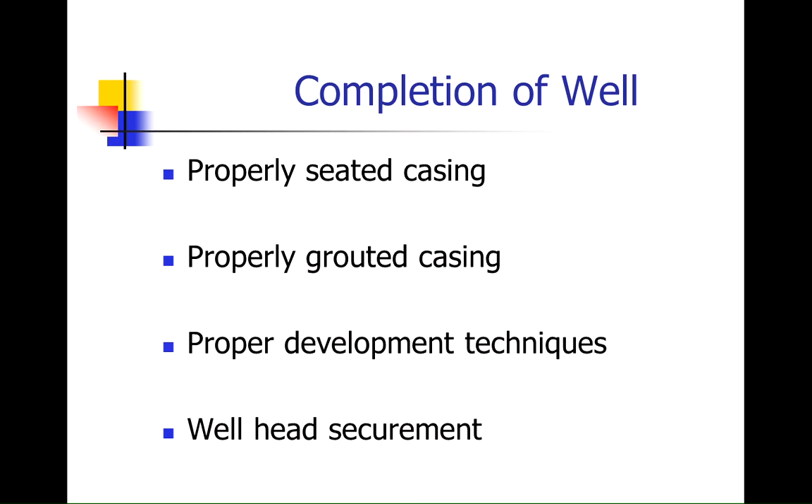Properly develop and make the best well that you can, and secure the wellhead. By all means, put a vermin-proof cap on it. In some cases, you might want to put a post up in front of it. When we get on a job site with a lot of construction traffic, we'll put a post up and paint it blaze orange, hang a flag or yellow ribbons on it so they know where it's at. I can't tell you, and I'm sure you can tell me, the number of wells that have been run over. It's not a pretty picture.

So what I say is the bitter disappointment from poor quality outlives the temporary joy of a cheap price. We have plenty of competitors, but no competition.

Make your company stand out as the professionals. I'm a master groundwater contractor, and everybody asks me what that does for me. Over the years, it's helped to a degree - they look at that title. But most recently, in the last couple of years and this summer, I've had customers call up after seeing on the NGWA website that I was a master groundwater contractor, and I got those jobs because they saw I was certified through National. Those certifications do come into play. If you get those certifications - pump installer, well driller, master, or whatever it is - put that logo on your business card. I've got them on mine. Be proud of what you are and what you do.

There's a lot of guys out there doing this job. Make yourself one better. Do that little extra step with the customers, and it'll come back to pay you.

Safety one more time - safety training. There's a lot of training available, and you should be doing the tailgate talks. Where do you get this information? The NGWA Bookstore has a lot of materials. Your insurance company's Loss Controls Division usually has a lot of materials for presentation, or they'll send out presenters for you. Federal Motor Carrier and OSHA have regulations and programs for safety.

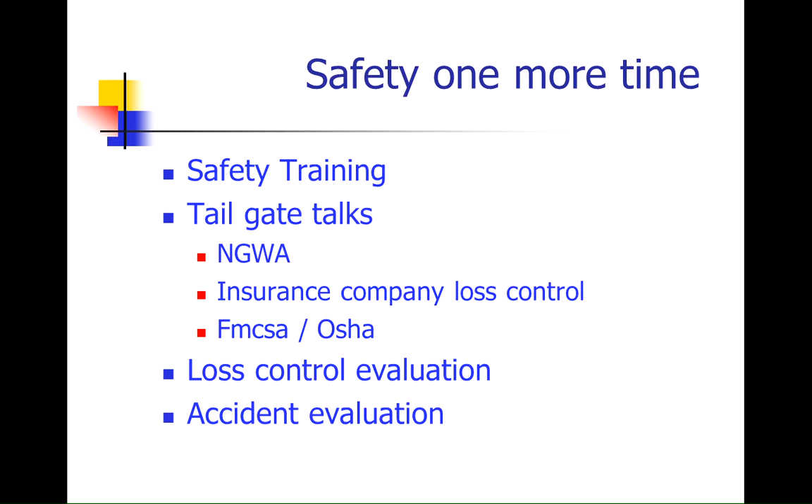Two things can happen: either he can get up there and pull that backwards with the roller on it, or we install a winch on the bulkhead of the truck. I can stand there with my remote control and have that winch pull that stabilizer down, letting it down with the winch and laying it there with just the movement of that lever. That's the way to do it, guys.

Safety first - we talk about that at work, we do it every day. But what about at home? Mom wants you to fix that, so you go to the drawer and pull out that old screwdriver. You know that thing's going to bite you because it's all worn out, and you do it anyway. Bingo, you hurt yourself. Carry safety to home.

At play, a lot of us have hobbies with high horsepower motors, snowmobiles, boats, hunting, or whatever. Be sure and use that safety all the time.

At the end of the day, you come home, get done with work - what do you do? You walk in the bedroom, sit down, take your boots off, drop the pants, throw them on the floor, and go to bed. Well, if you're my age, and my last name's Thron, I've got to visit a relative occasionally during the evening. So you get up and walk around the corner of the bed and trip on those boots or pants. Next thing you know, you lose your balance, put a hole in the wall, wake mama up, and everybody's in trouble. Use a little extra safety - hang that stuff up and use a little caution there.

Make safety last. Think about it.

In closing, in Minnesota, I've had the opportunity to start some groundwater festivals for children. The metro area of St. Paul, Minneapolis came up with this quote that they put on their shirts - think about what it says: water affects everyone and everything on earth. We provide the second most important thing to people; the first one is air, the second one is water. We are the groundwater professionals.